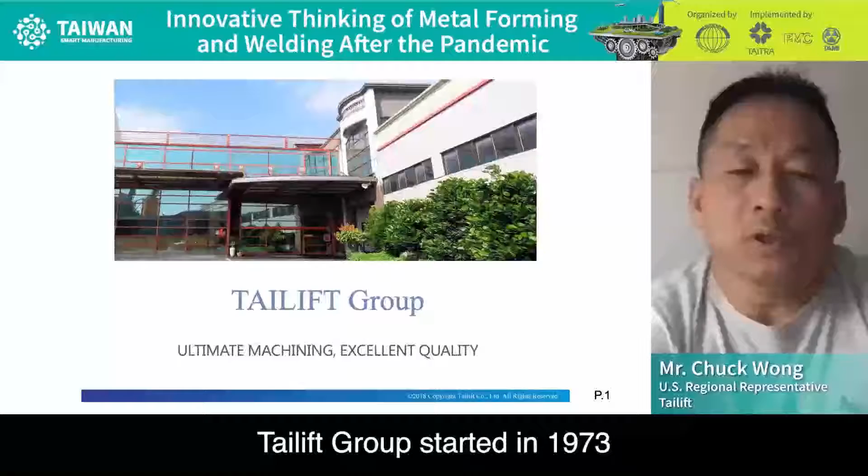Welcome, Mr. Wong. Hello, my name is Chuck Wong. I am a representative for Tailift Group, Taiwan, from the U.S. Tailift Group started in 1973 in Taichung City, Taiwan, by Mr. Steve Lin.

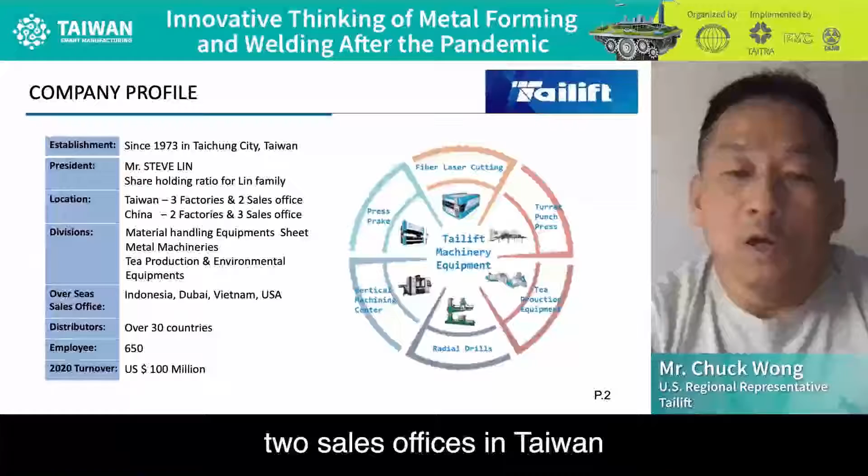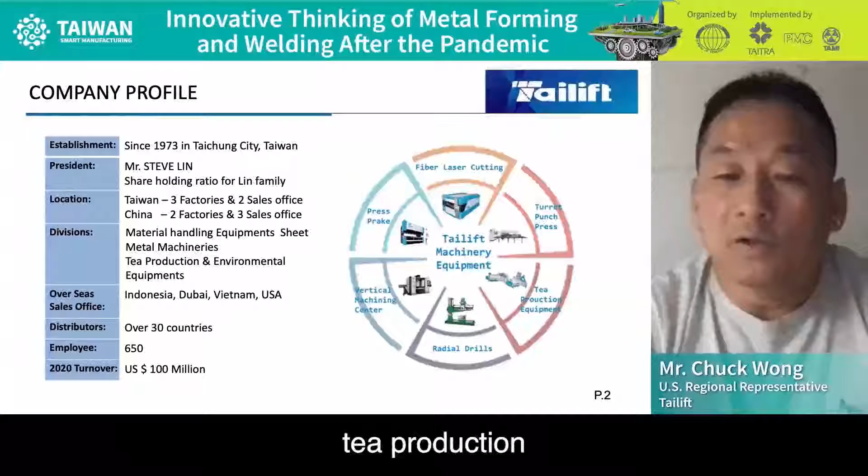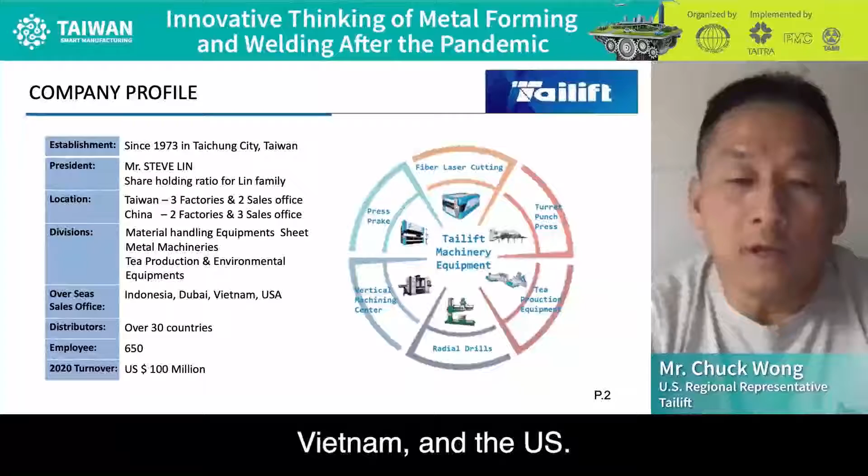This is a family-run business. Currently, we have 3 factories and 2 sales offices in Taiwan, 2 factories and 3 sales offices in China. We are a material handling equipment, tea production, and environmental equipment fabricator. We have sales offices in Indonesia, Dubai, Vietnam, and the US. We have distributors in over 30 different countries. We have a total of 650 employees.

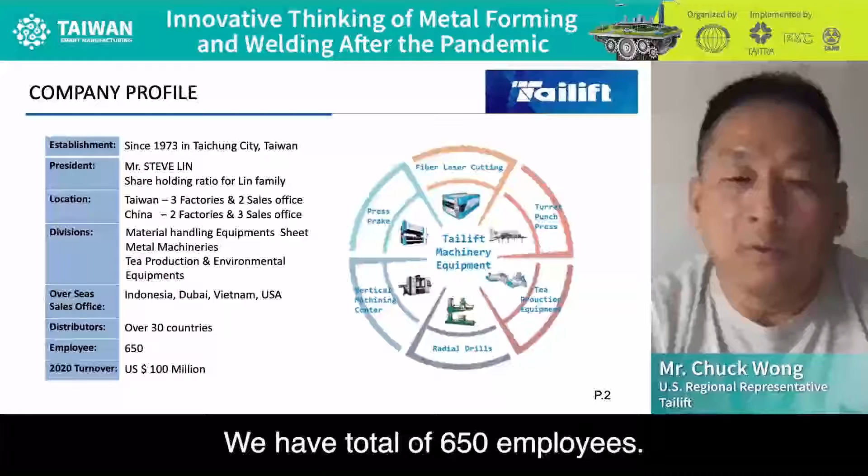Our sales reached $100 million in 2020. We started our Taichung factory in 1973.

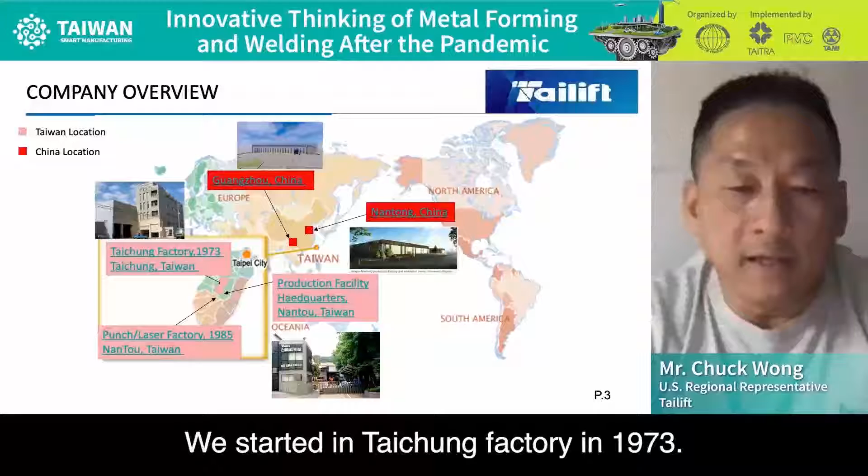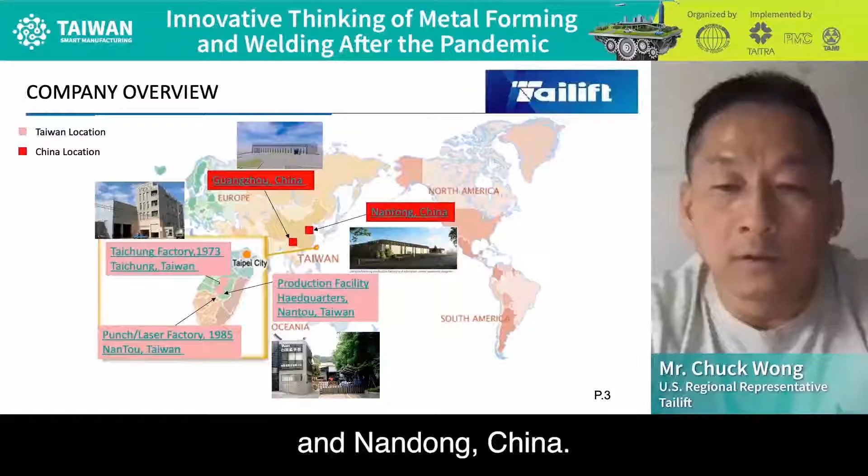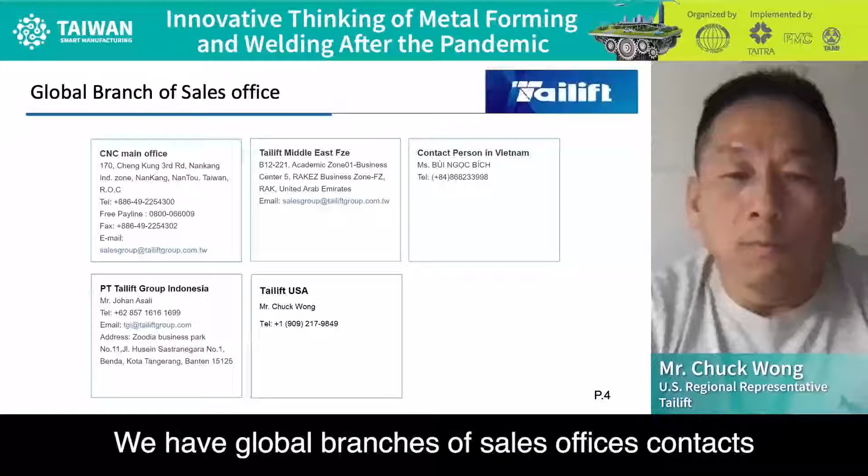In 1985, we started another factory with punch laser in Nantou, Taiwan. We also have factories in Guangzhou, China, and Nantong, China. Our production facilities are located at our headquarters in Nantou, Taiwan. We have a global branch of sales office contacts so you can reach us throughout the world.

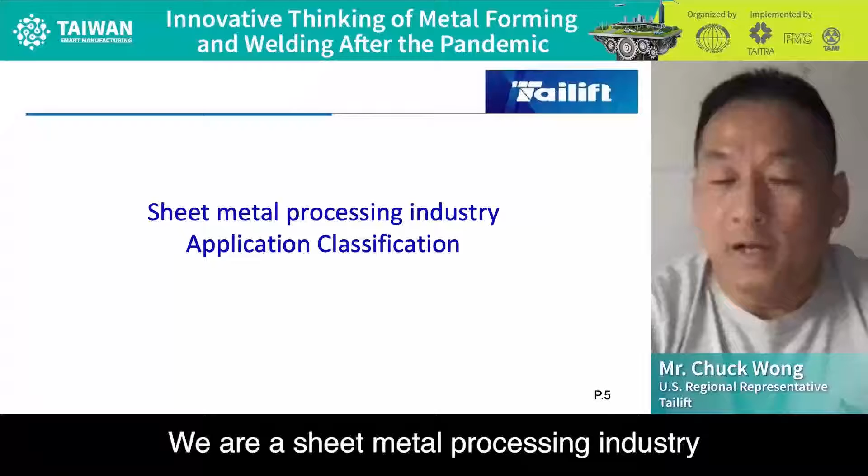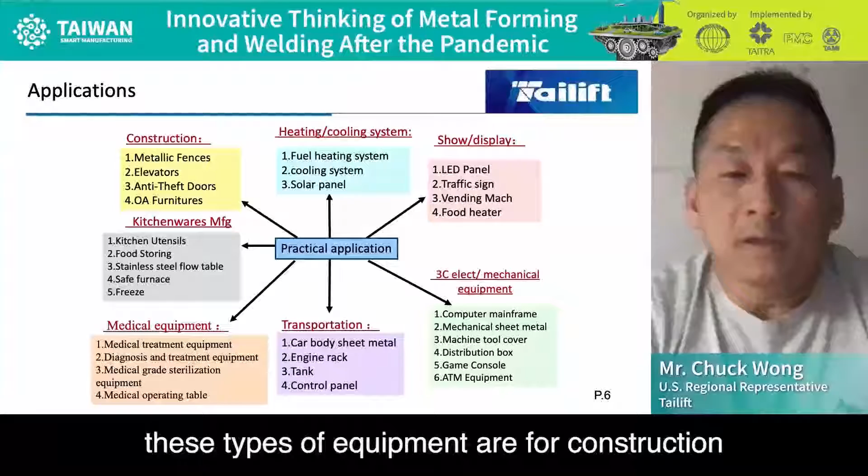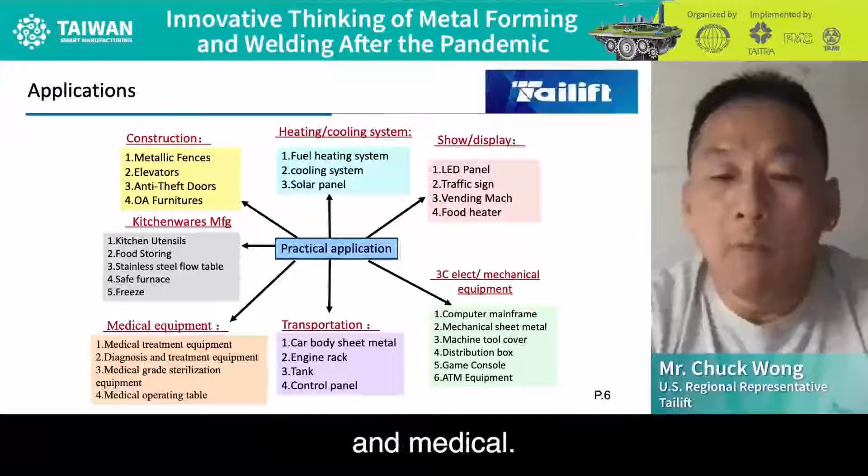We are in the sheet metal processing industry, and I would like to talk a little bit more about the application of being used on these types of equipment. For instance, these equipments are used for construction, heating and cooling systems, show display, electric, mechanical equipment, transportation, kitchenware, and medical. These are only a few examples of what we process with our equipment.

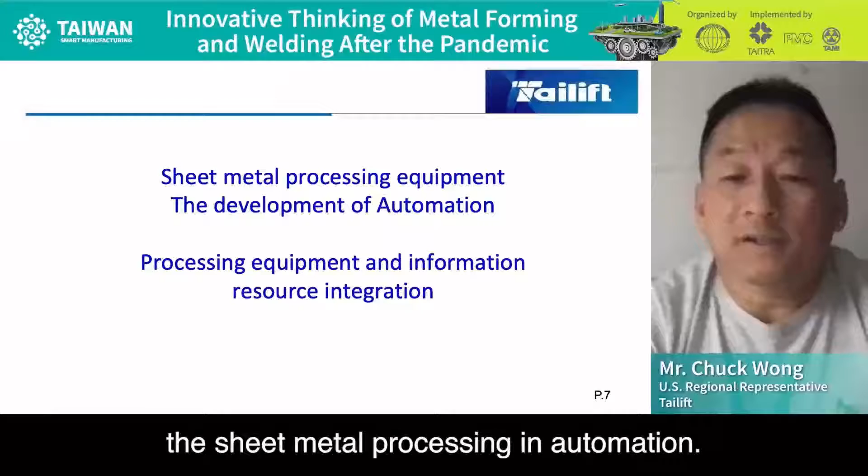Sheet metal process equipment automation process. Here on the following page, I would like to show you the sheet metal processing in automation. As you can see, this is shown in the red and blue color of the flowchart.

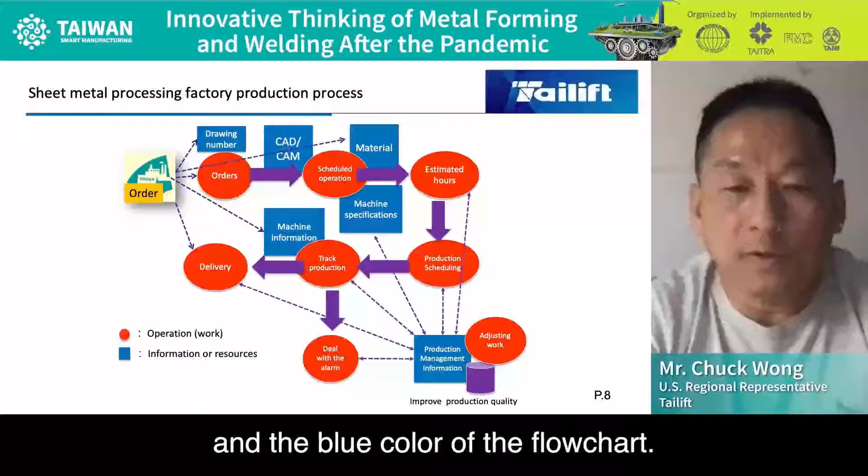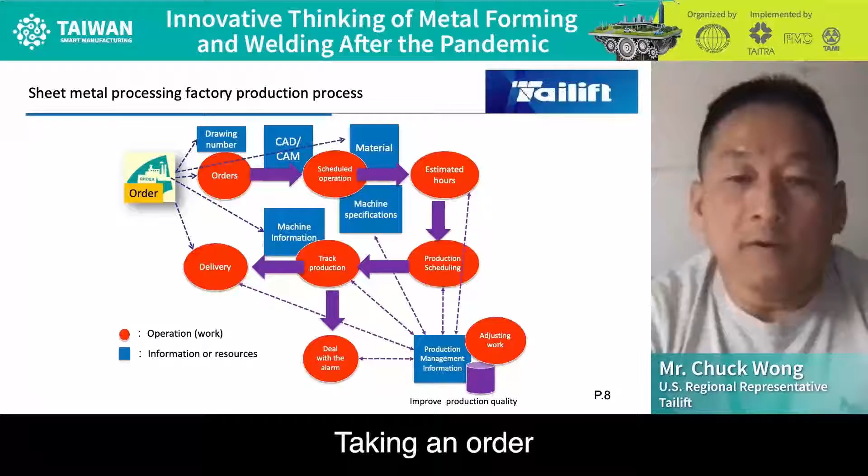The blue color shows you the process through the office, from taking an order, entering an order, processing through the internal system of the company. The red shows what goes out to the factory, taking an order, distributed to different departments for processing until the product is done and shipped out to the customer.

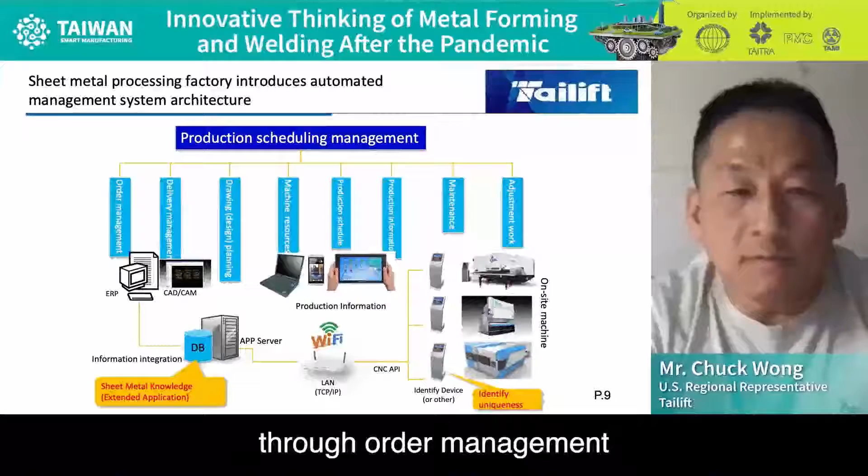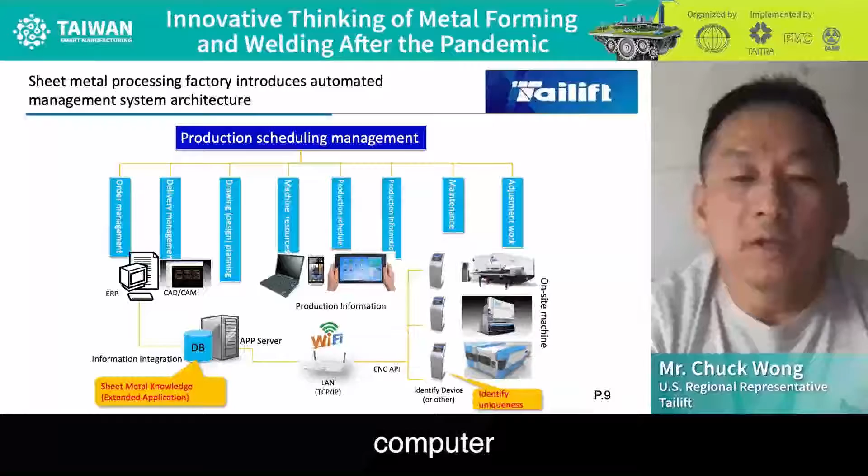This next page shows you, through order management, delivery management, drawing management and planning, equipment, computers, software like ERP, CAD/CAM systems to process the manufacturing requirements to get the products done for the customer.

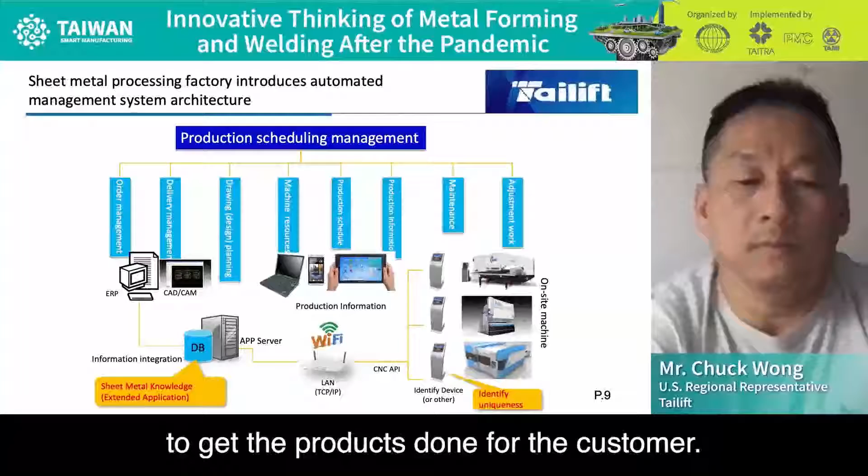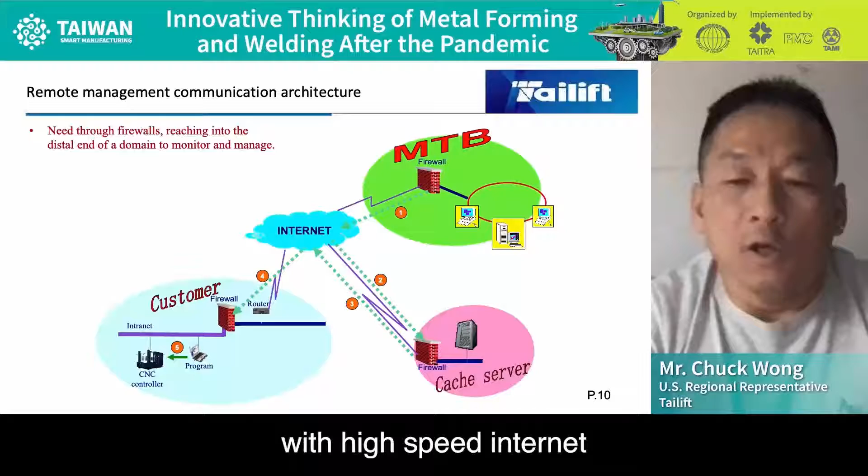With that said, you have to have a good internet system with firewall protection, with high speed internet to protect the data, and to be able to remotely communicate throughout your whole company process.

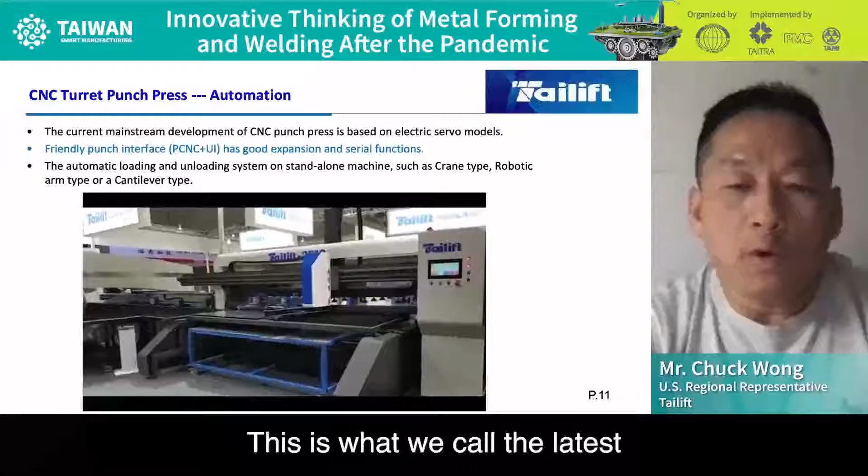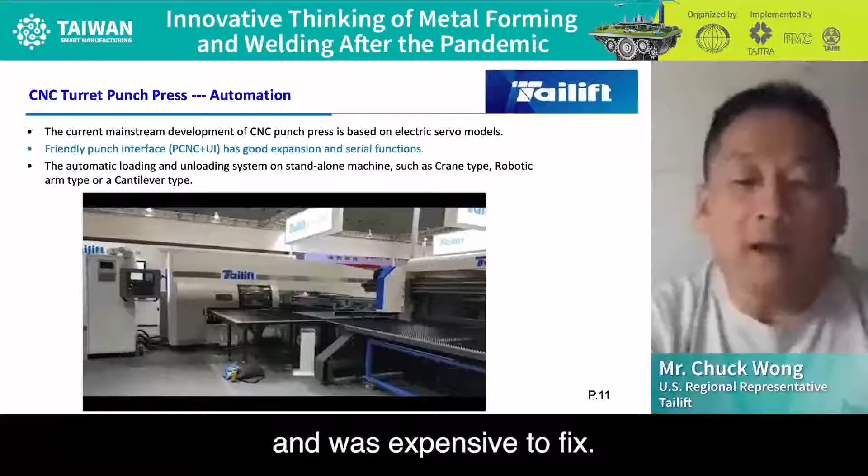Here, I would like to show you the latest and greatest punch press that we have. This is what we call the latest servo electric model. Unlike the old model, which was hydraulic, causing a lot of oil leaks and expensive fixes, with the servo electric model we don't have to do a lot of maintenance.

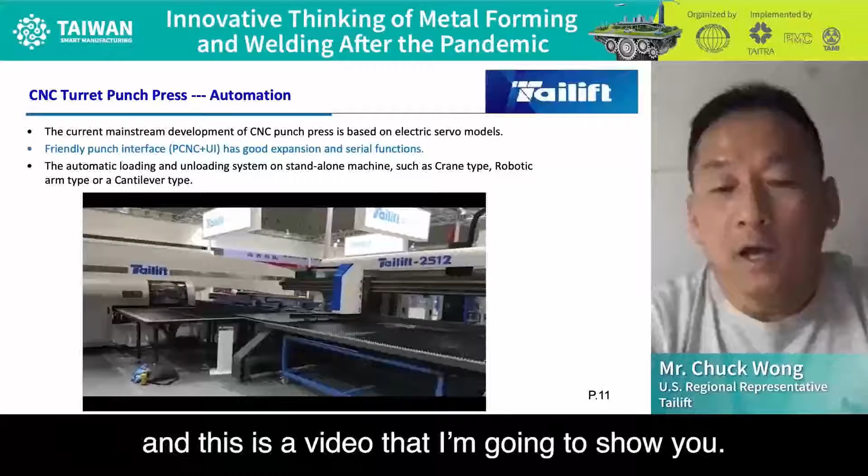This is a video that I'll show you. It comes with a load and unload system.

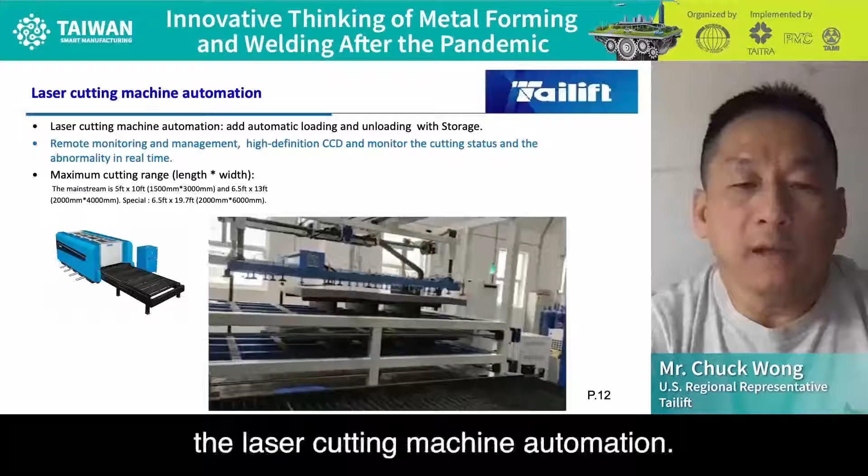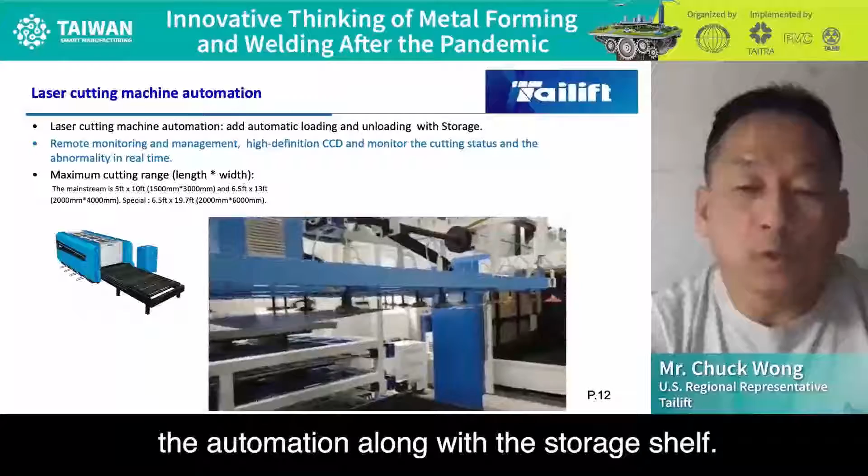Here I have a video showing the laser cutting machine automation. This is the latest, also showing the automations along with the storage shelf. You can customize whether 6, 8, 10, or 12 shelves, depending on your facility's needs.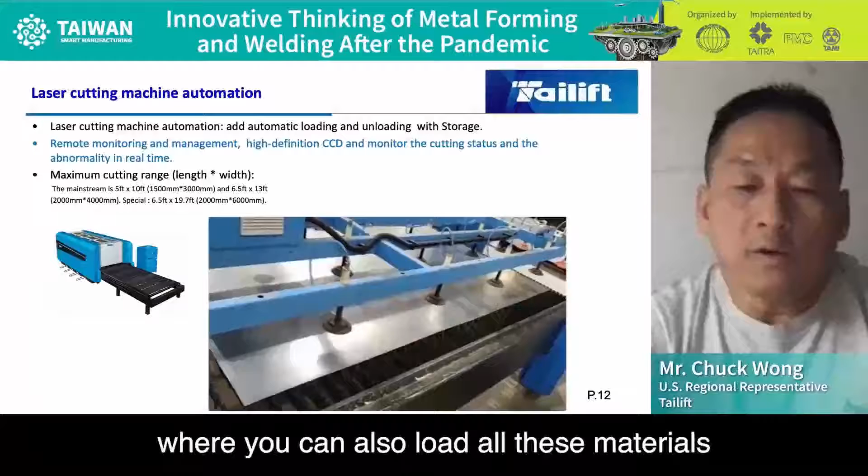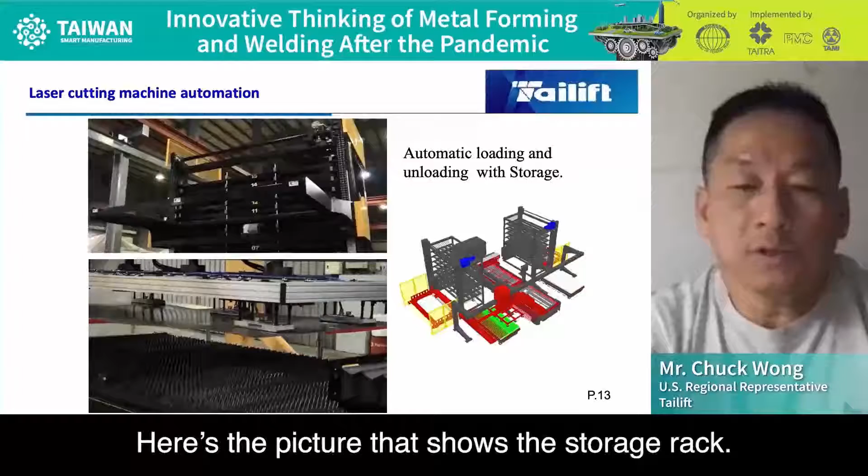It shows that you can also load all this material into the machine and unload it without an operator, saving a lot of processing time. Here are pictures with the storage rack that we showed.

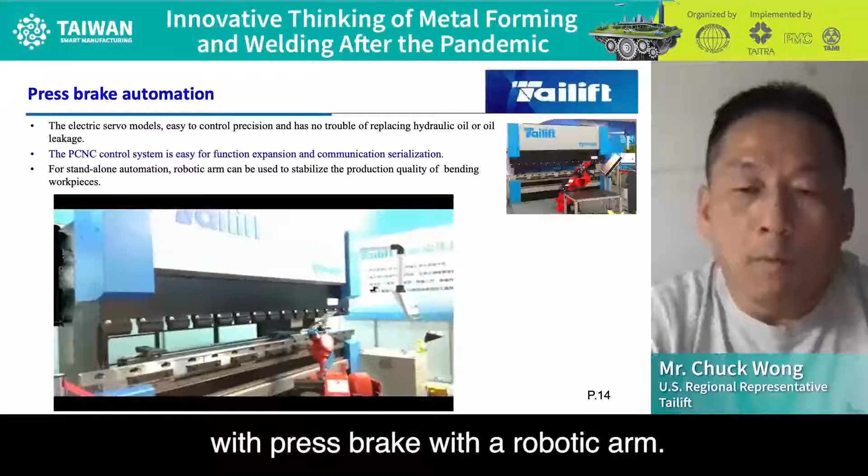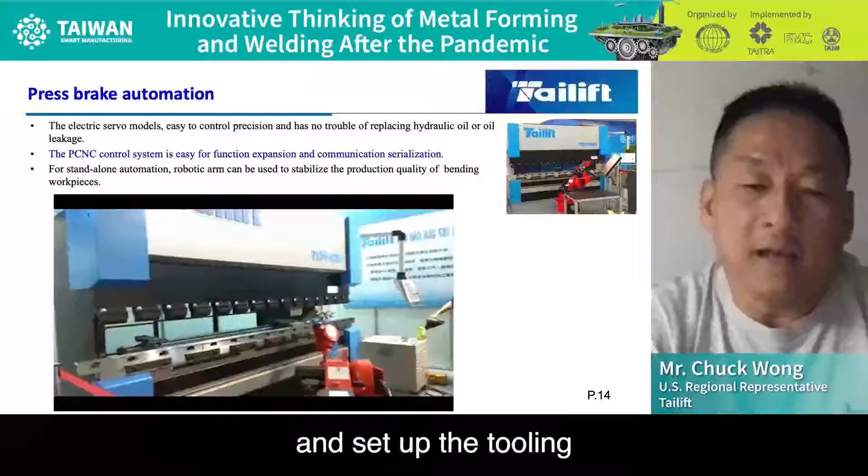This video will show you the press brake with a robotic arm. As you can see, with the robotic arm, we don't need an operator to stand and set up the toolings and get everything done. With the robotic arm, we can have automatic tool loading, automatic tool bending, and automatic tool unloading as part of the automation process.

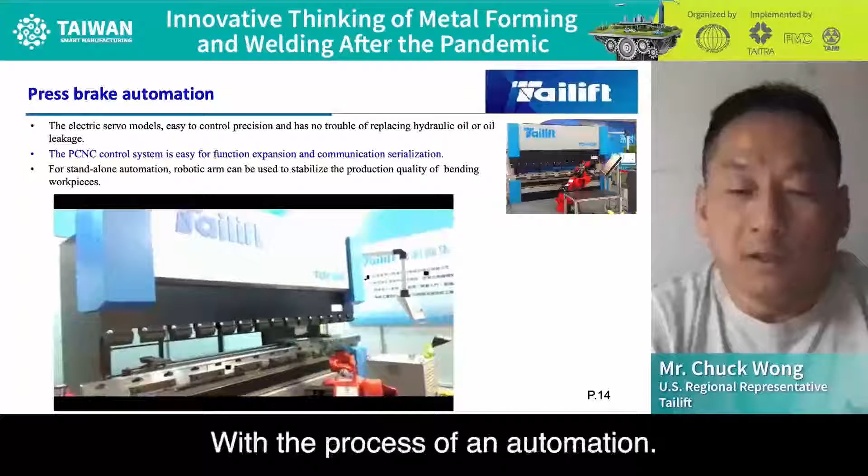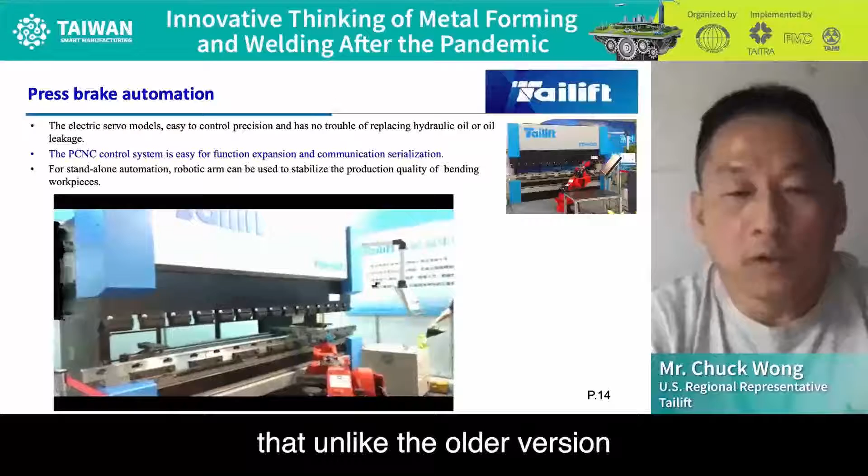Besides that, this is also another servo electric press brake that, unlike the older version of the machine which used hydraulic, is all electric, eliminating a lot of maintenance costs. Thank you again for all your time. I really appreciate it. Please contact her should you have any questions.

Thank you. The second question is for Mr. Chuck Wong from Tailift. Chuck, one of the newest automation features in your laser cutting equipment is automatic loading and unloading that eliminates the need for an operator. Can you explain how that works in a little more detail?

Yes, thanks for the question. So with the load-unload system, we have single or multiple storage unloading systems that eliminate the operator having to run back and forth doing everything manually. The load-unload system works by processing a whole pallet of material onto the storage shelf, and from there it automatically loads into the machine to process, whether it's laser cutting or punching. Once finished, it unloads the material onto the storage shelf. In some instances, customers can request to unload individual parts and stack them up into a storage bin.